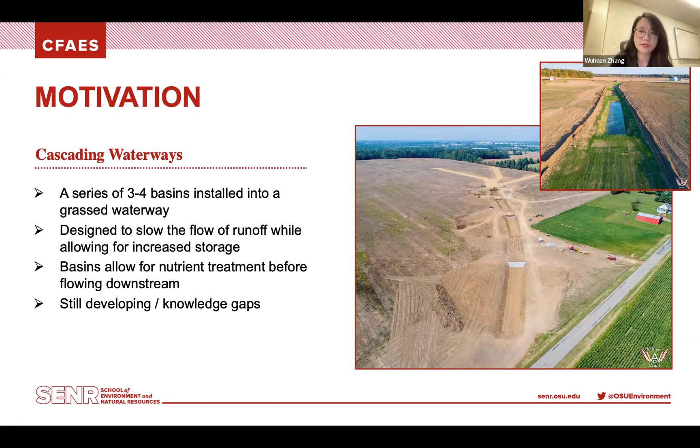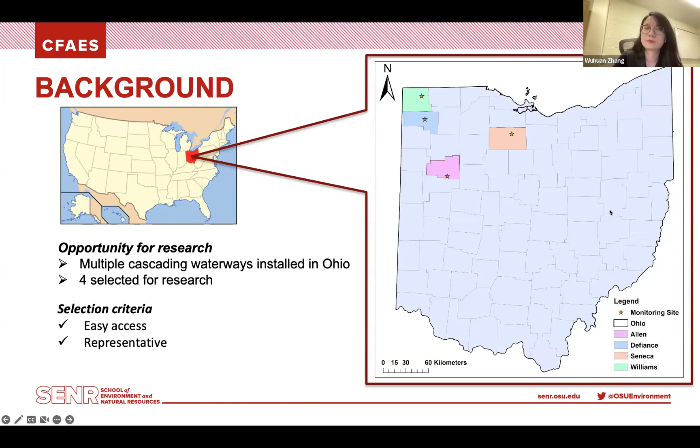We are interested in both the water quantity and the water quality performance of these selected cascading waterways. The water quantity parameters of our research include the water levels, flow rates, and the flow volumes, to learn more about the volume reduction after the treatment through the cascading waterways for all the monitored storm events, with the infiltration and evaporation considered.

And the water quality parameters we care about include the nutrients, total suspended solids, and isotopes. The stormwater samples collected from our field through the H-flume paired with an ISCO autosampler will be carried back to the OSU water quality lab from our fields for chemical analysis.

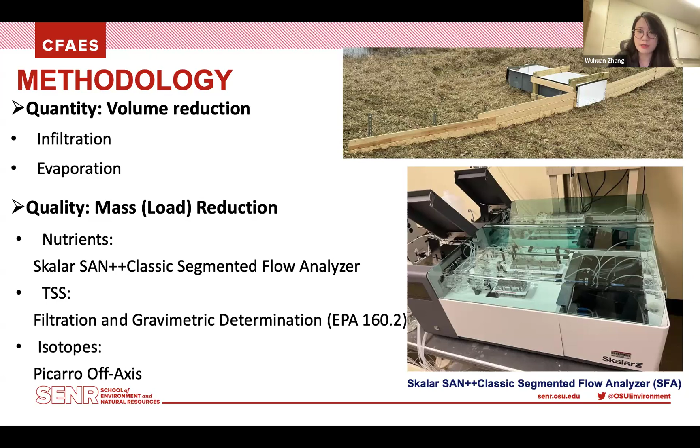The figures in this slide show the types of equipment which are employed in our field and in our lab. The top one is an H-flume installed in the field to collect the inflow. And the picture at the bottom is the SFA equipment to be used to analyze the nutrients in our lab.

The nutrients in the water samples we are interested in include the total phosphorus, total nitrogen, dissolved phosphorus, and dissolved nitrogen. They are tested by the SFA in the Ohio State University Service Testing and Research Lab in Wooster. And the total suspended solids are analyzed through the EPA methods in our lab. And for the isotopes, the samples will also be carried to the Columbus main campus to test the isotopes in the water samples for analysis.

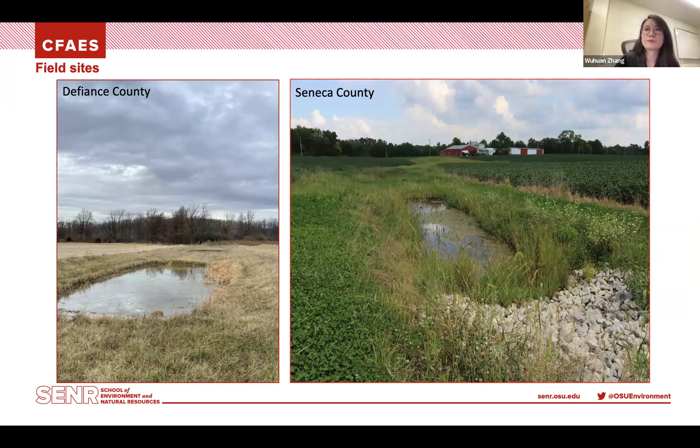Until now, multiple pieces of equipment have been installed in our field by our team to start the initial monitoring work, including the weather station, HOBO piezometer, and the field cameras. The METER weather station can measure and record the weather information, such as rainfall data, relative humidity, and air temperature. It's also able to upload the data into our cloud through the data logger paired with it, so that we can get the data and information remotely.

And the HOBO gives us data on water temperature and water pressure in the basins, which we can use and convert into the water volume of each basin to see how it changes over time with the rain events, and then consider the evaporation or infiltration. The field cameras could help catch any potential motions and movements in the field. They are installed in the hope of taking some photos of the storm runoff during our monitored rain events.

We also grab samples from all of our sites at least once a month to test them for nutrients and isotopes to further determine the evaporation and the nutrient load that is happening in these basins.

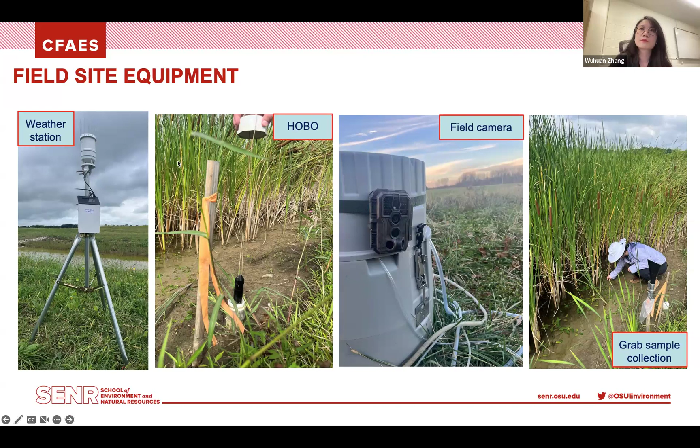And these wood boards, as you can see here, will work as the wing walls to make sure as much runoff as possible will travel through our flume for our flow volume recording and calculation.

This slide shows the field equipment which is used to collect the stormwater samples in more detail. The ISCO automated stormwater monitoring samplers are installed at each of the inlets and outlets of all of our 4 sites to determine the improvements of the stormwater flow and the water quality. And it will work with the H-flume together. And there is also a 730 bubbler paired with the ISCO autosampler.

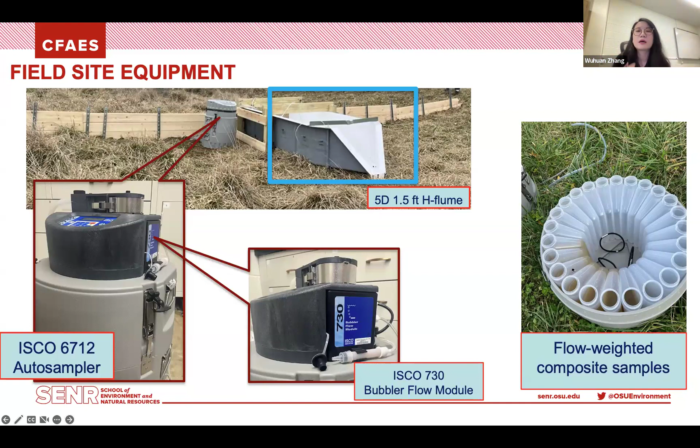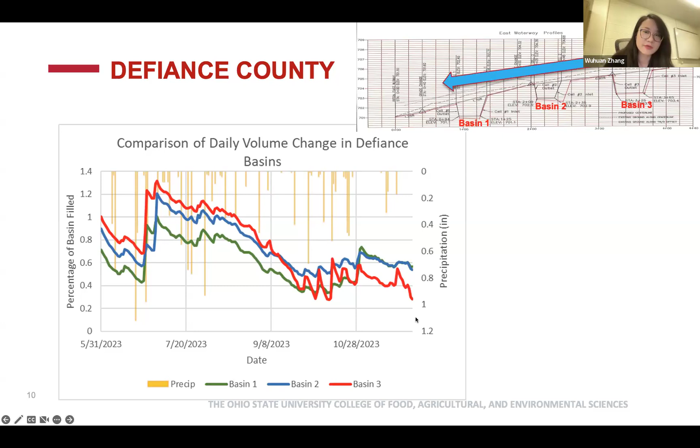The yellow bars in the figure indicate the rainfall depth records from May to December of 2023. The left y-axis indicates the percentage of the basin's filled. Any line above the number 1 here indicates that basin is overflowed at that time. And this figure shows basin 3 tends to be more filled than basin 1, while basin 1 only barely overflows once during the monitoring period of 2023. These results indicate that this cascading waterway system is working as intended to store and reduce water. And the overall runoff leaving the system is significantly decreased after the storm events.

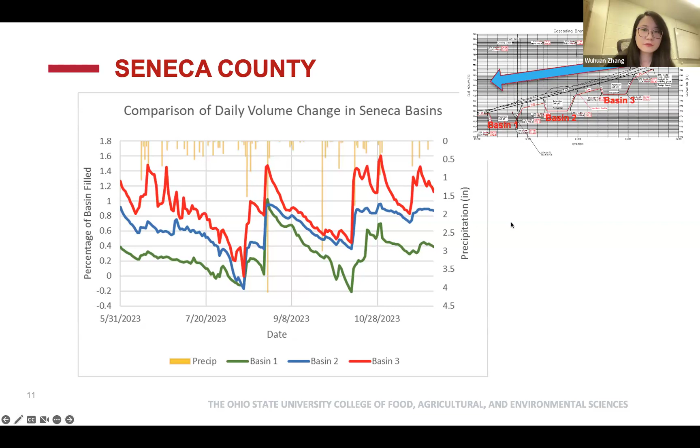However, as we get more flow data for the next step, we will know more about the basins, the nutrient loads coming in, and their functions in treating the chemicals. Also, as we move forward in this coming season, we will get more event-based samples, which will tell us more about this story.

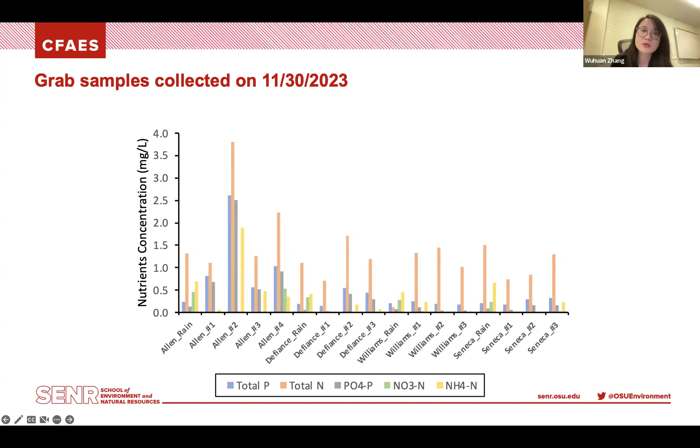For the next step, we will work through the performance data comparing the evaporation to infiltration rates. Until now, we have done the flume installations for the Defiance and Seneca County sites. The flumes for Allen County and Williams County are designed and will be ready to go out next month. We will also continue monitoring the performance of all 4 of our selected cascading waterway systems during storm events. Also, we will have our 5th site at Fayette County built soon. Once it's done, we will start some initial monitoring for it.

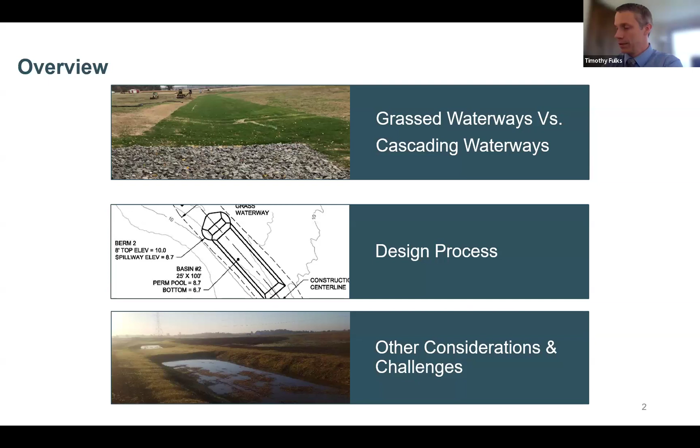Then we'll wrap up by looking at some of the other considerations and challenges we have with these projects. And if we have a little bit of time, I'll probably run through a few slides that highlight some of the projects we have installed so far. So with that, we'll move into the overview here.

So I thought it'd be good to start out talking a little bit about what's a typical grass waterway, why do we do a grass waterway, where do we put them? And the purpose of a grass waterway in a traditional sense is primarily to correct gully erosion or prevent gully erosion within a farm field. Places where we have concentrated flow paths going through the field that are eroding the soil away, creating soil loss, gullies that can be issues with farming.

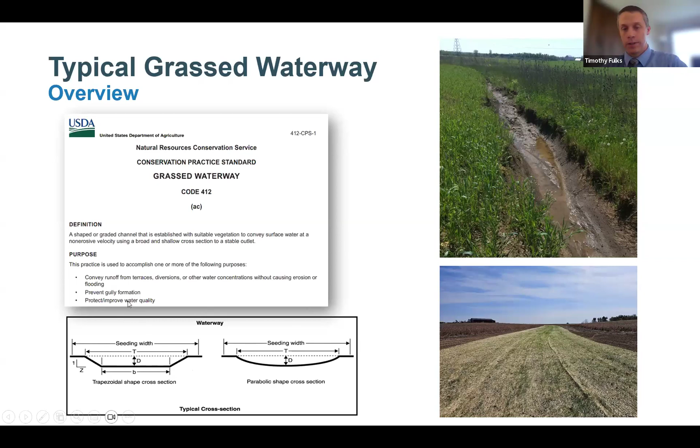So when we design a typical grass waterway, what we're trying to do is create a means to convey a given storm event. So usually we're designing for a 10-year, 24-hour storm event. We'll figure up how big is the watershed, how much flow can we expect based on the characteristics of that watershed. So that includes soil types, cover types within the watershed, drainage, subsurface drainage. We'll look at all those things to try and figure out what's the expected runoff and peak flows from that watershed.

And then from there, we'll start looking at what's the proper width, depth, shape, slope of that grass waterway so that we can convey that water without causing additional erosion and also keeping it moving so that we're not getting sedimentation of the sediments coming into that waterway. And that's an important design aspect of a grass waterway. We want to correct the gully erosion that's occurring in the field and prevent additional gully erosion.

But whatever flows into that waterway from upstream in the watershed, we want to keep that moving through the waterway. So solids, sediment, silt that are coming into a waterway, ideally, those keep moving through the waterway and exit at the downstream end. Otherwise, we start getting that sediment building up within the waterway, and we'll lose capacity in that waterway. It won't be able to convey the flow it's supposed to. Water can start pushing outside of the waterway, and we can create erosion again on the outside. So with a waterway, ideally, sediments, nutrients that flow in are also flowing out on the downstream side.

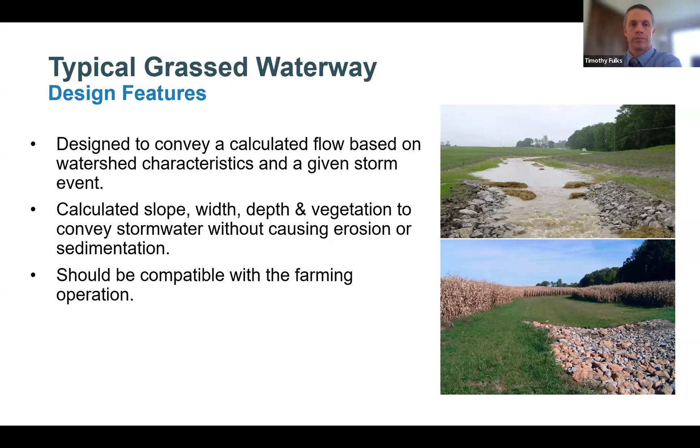So what are the water quality benefits of a typical grass waterway? Well, to start with, it addresses that sediment loss that we're losing from the gully erosion and preventing future sediment loss from the gully erosion. And on top of that, that's pretty much it. That's what we're striving to do, address that soil loss from the gully erosion, and that's it.

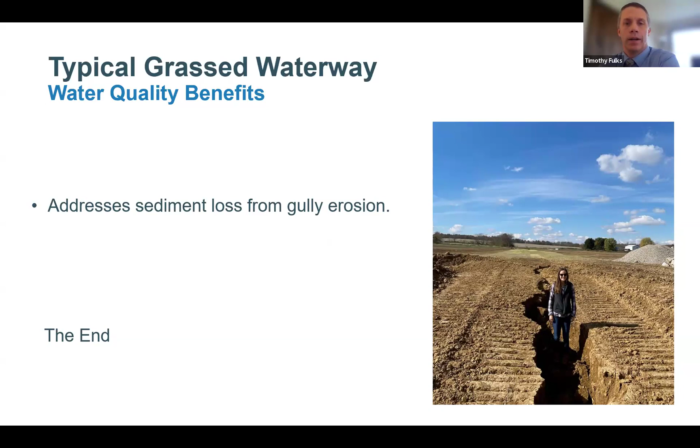You may see a little bit of sediment reduction. Again, that sediment that gets trapped in the waterway, but that's not what we're designing for. We're trying to keep that sediment moving through the waterway so that the waterway doesn't begin to fill in with sediment and create an issue with conveying that flow. You may get a minimal amount of nutrient cycling with the vegetation, but minimal at best. All right, so enter the actual cascading grass waterway.

So these, we designed them to convey that flow again, same way we would with a typical grass waterway. We'll design a traditional grass waterway shape that'll convey the predicted runoff and peak flows from the waterway. But then we're going to start adding in pools within the flow path of that waterway to create some additional retention and water quality benefits within that watershed.

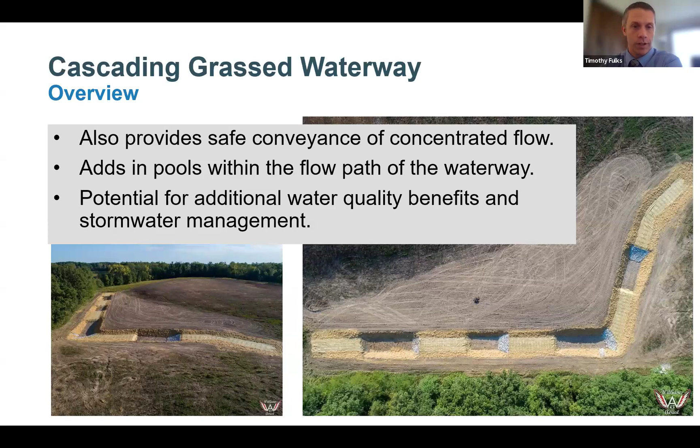And along with that, they did complete a 2-year study looking at reductions in runoff volumes, suspended solids, nitrogen and phosphorus. And they did note pretty decent reductions within runoff, the suspended solids, the nutrients. But the takeaway from that was that those reductions were all mass-based, primarily from the reduction in runoff. So they didn't see big changes in the concentration of your nutrients and your suspended solids. But since they had these pools installed, they reduced the total runoff leaving the landscape, thus resulting in a reduction in the total mass load leaving the system.

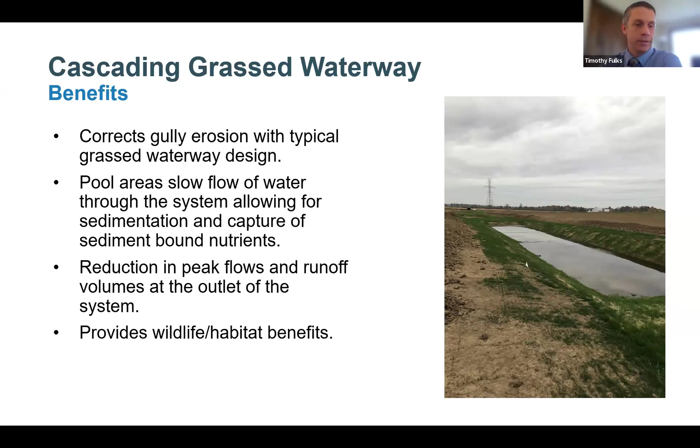All right, we'll talk a little bit about the design process and what we look at when we're designing one of these systems. So to start with, we'll typically just design a normal grass waterway. We'll figure out that watershed size and what the expected runoff volumes and peak flows are going to be, and we'll size that with our normal process.

We'll think about whether we want to do a parabolic versus a trapezoidal shape. A trapezoidal shape tends to lend itself a little better towards the cascading waterway system because we have this flat bottom within the cross section of the waterway. That works well with then transitioning into the excavated pool below that.

We can make parabolic cross section shapes work as well. The contractors just have to do a little bit more work to blend that outlet of the pool back into that parabolic shape downstream of the pools. But we can make either work, and we've done both within Ohio here.

After we decide on waterway shape, size, and flows, then we're going to start looking at what are our storage goals as far as the volume of water from the watershed. The design manual I mentioned earlier suggests shooting for 0.2 of an inch watershed acre inch of storage. So in practical terms, what that means is that, say you've got a 10-acre watershed draining to your system, you're trying to create storage equal to a depth of 0.2 of an inch over that entire watershed.

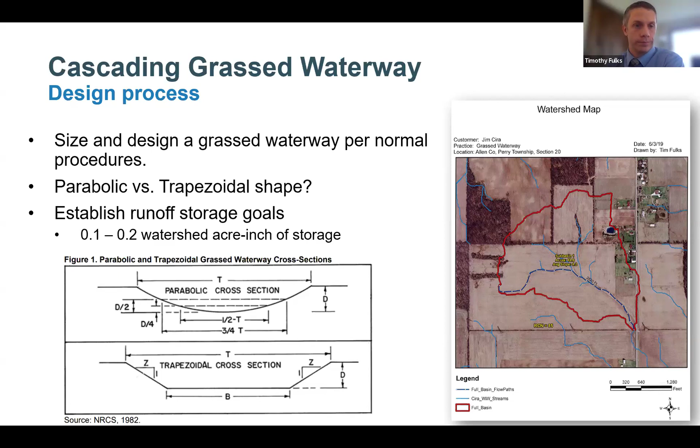Okay, so once we've decided on storage volumes for our pools, then we can start looking at how we're going to fit those pools within the waterway system. We could do excavated versus berm pools, or a combination of both. If you see this graphic here in the bottom left, this is a profile view of the water going through a system, starting here in the top left and flowing to the right. So in this case, this is an excavated pool within the waterway, and we've created all that storage volume simply by excavating this pool area out within the bottom of the waterway.

Compare that to the image here on the top right, where we're also excavating, but then we're using some of that dirt to also create a berm and hold back additional water. Here in Ohio, we've worked primarily with excavated pools and kind of shied away from doing bermed pools. We're not too crazy about building berms up within a waterway system that's supposed to convey that water downstream when we get a storm event.

This graphic in the bottom right here is a plan view look at a bermed pool system. So you can see we've got the berm here in the middle, but to be able to convey that storm flow around that, we have to build in spillways. So we end up with a wider waterway system. So for everything we've done in Ohio here, we've done just excavated pools, which creates more earthwork to deal with. We'll talk about that a little bit more here as well.

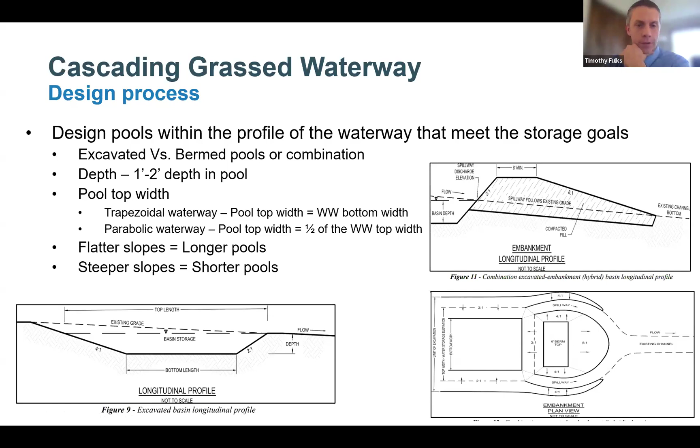So if you're looking at this profile view of a waterway system, this solid pink line here would be the design profile of our waterway. So this would be the center bottom of a waterway.

This lower section is a relatively flat grade at 0.2%. And then here in the upper section, we've got a steeper slope at 1%. When we do an excavated pool, the controlling elevation is that downstream edge of the pool. So that's as deep as we can build water up within that pool.

And as we go upstream, you can see we have all this extra earthwork above the shaded blue area that we have to dig out, create extra dirt and earthwork just to get down to this depth where we can actually store water. And on this flatter slope, I can go from station 100 all the way up to almost station 600 before I've created 1 foot of extra depth of spoil that has to be dug out of there.

Now, if you compare that to this slope here where we've got a steeper slope at just 1%, I can only run about 100 foot before I've got the same depth of soil over top of that we have to dig out. So if I were to extend this pool here another 200 or 300 feet, we're going to have a lot of earthwork that we have to dig out just to get down to that depth where we have actual storage capacity.

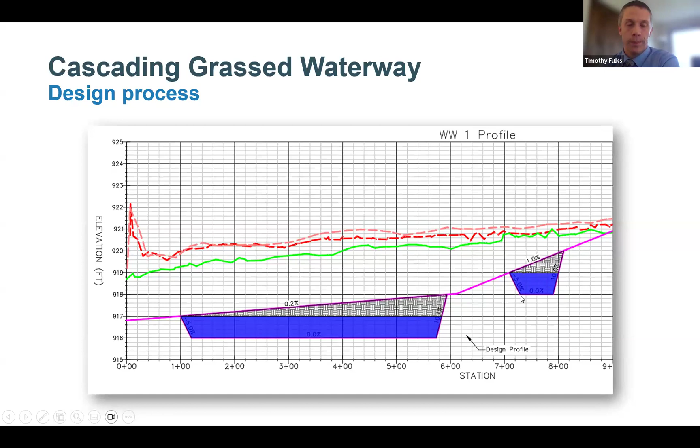So yeah, we like when we have flatter slopes, we can do longer pools, but when they get steeper, we ended up building in shorter pools to minimize that extra earthwork.

As we look at the inlet of the pool, where the water is going to flow into it, we'll design rock protection within there to help stabilize that soil and make sure we don't have erosion within there. Typically, we're going to do D or C size riprap, stuff that's 6 to 18 inches in diameter. So some bigger rock, stabilize that. We're going to try and keep that slope on the upstream side of the pool fairly flat to help minimize velocities coming in there and keep that bank stable.

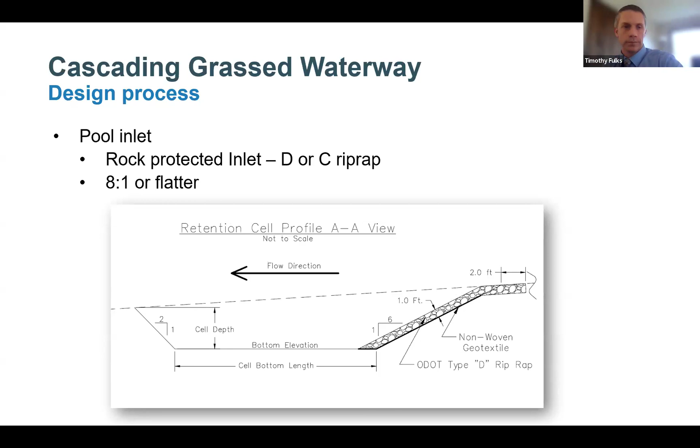On the other design parameters of our pool, on the outlet side, the downstream side of the pool, that slope can be a little bit steeper, 2 to 1. And then on the pool side slopes, we'll keep those 3 to 1 or flatter. One thing we have to look out for is, do we have concentrated flow paths trying to enter in the side of a pool area?

We've had a few of those where a smaller flow path flowing into the side of the pool has started to eat into the side a little bit. So we've got to keep an eye out for concentrated flows coming into the side there. May need to protect that or keep it a little bit flatter to keep those side banks stable as well. As far as spacing these pools out, we shoot for at least 50 feet in between those pools. Provide some space in between there, provide a place for farm equipment to pass in between the pools.

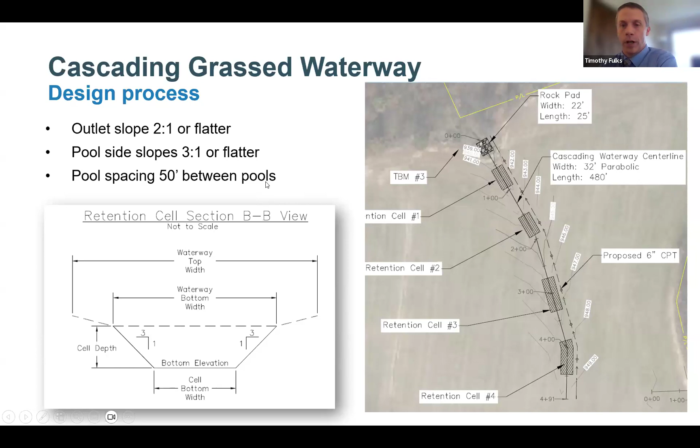All right, so those were the main design things we're going to be looking at when we're putting these on the landscape. I'll talk a few minutes about some of the challenges and issues we've run into with these. Obviously, the first one is if we're doing strictly excavated pools, we end up with a lot of excess soil to deal with. So to give you an example here, if we've got a 25-acre watershed and we're trying to store 0.2 of an acre inch within those pools,

every cubic foot of that storage has to translate into dirt that's excavated out of that waterway shape. So just to get that storage, we're going to be at 18,000 cubic feet or roughly 672 cubic yards. That's just to excavate the pools. It doesn't account for the overburden over top of those areas as well. So you'll have that extra soil as you excavate the soil over top of it, and then you're going to have your normal soil that you're excavating to shape the grassed waterway. So we end up with lots of dirt to find a home for.

If we've got some rolling topography within the landscape, usually it's not too much of a problem to get that blended in. In some cases, we've had other practices on site, wetlands or WASCOBs, where we needed that soil to create dikes or berms and were able to use some of it that way. But if you are interested in installing one of these within your farm field, start thinking about a place to put all this extra dirt.

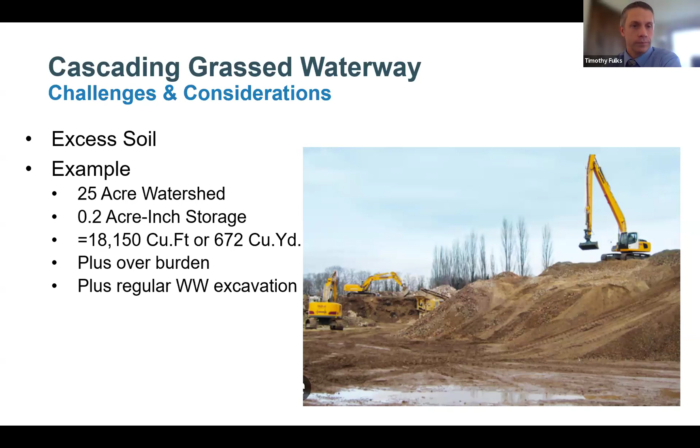The other thing we've run into, and I mentioned this earlier, is that here in Northwest Ohio, at least, we've got a lot of clay soil and they tend to hold water really well.

So what we end up with, these pools fill in with water and they stay full for extended periods of time. We end up with saturation on the downstream edge of the pools because those pools are staying full clear near to the top. So that water seeps through the soil, saturates the grass waterway just downstream of the pool, and it can be challenging to establish vegetation in those areas. Those areas stay soft and wetter longer, which can be a challenge for crossing equipment.

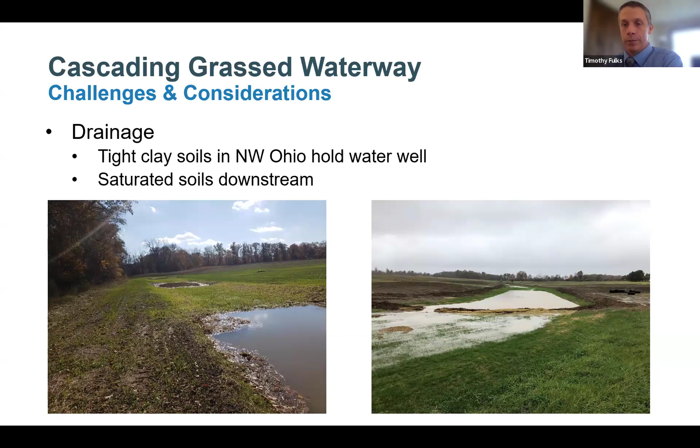So we'll look at that as we work with these in the future, look at ways to keep those pool elevations maybe drained down just a little bit so we don't get those saturated leading edges downstream of the pools. Actually, out in Maryland, where they installed the first system, one of their concerns was runoff storing in those pools and getting away into the groundwater too quickly. Obviously not a problem we have here in Ohio. We've got the problem of everything sits in the pools too long. And we lose a little bit of that storm reduction capacity if these pools aren't draining down very quickly. So we're losing that benefit if we're not getting that retention gain back within the pools.

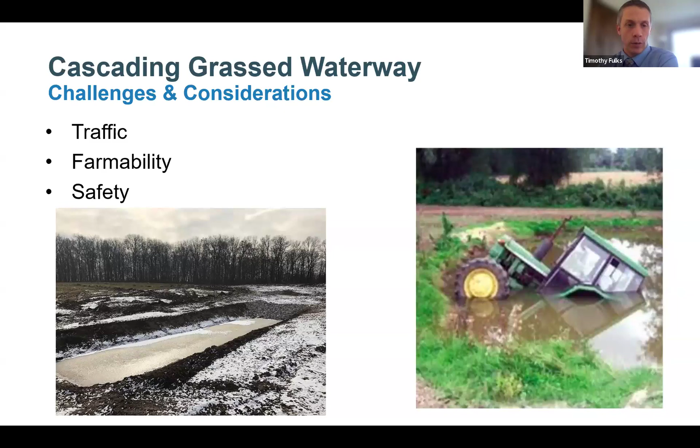Funding for these. So right now, this is not a practice funded by NRCS. So funding is not available through EQIP or CRP for these, as we don't have a conservation practice standard in place right now. The primary way we've been funding these so far is through Ohio EPA 319 grants, as well as assistance from the Great Lakes Restoration Initiative. To be able to get funding through a 319 grant, you also have to have a 9-element plan in place for the watershed. So that's one of the first steps to be able to secure that funding, is to have that 9-element plan developed, identify those needs within the watershed to have this kind of practice, and then that opens up funding opportunities through Ohio EPA.

As far as design and review and approval, since there is no current NRCS practice standard, this practice can't flow through NRCS engineering staff. So we're either working with private engineering staff or ODA's Division of Soil and Water staff can assist with engineering those, so long as we have district partners that are willing to help us with the groundwork, and we can help go through the design and review process and get these designed and put out there.

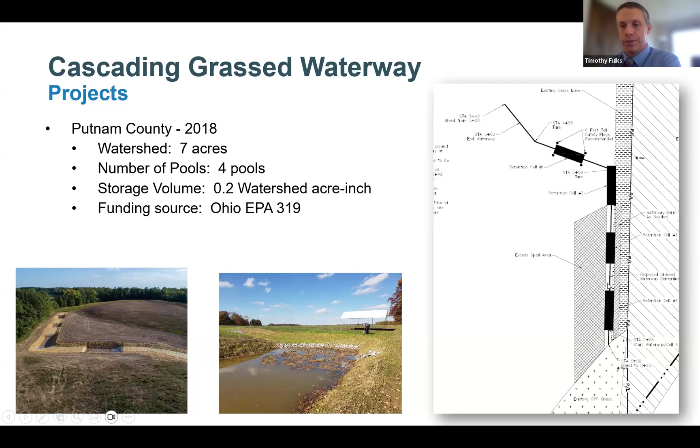Okay, so that's pretty much it as far as design considerations and some of the other challenges and things we've seen on these. I've got a few more slides here that highlight some of the projects we've done so far. These slides don't cover every single project we've done in Ohio, but we've got most of them here. So here's one we did in Putnam County back in 2018. Watershed was 7 acres, so relatively small watershed for the waterway. We installed 4 pools there, and we were able to hit that 0.2 of a watershed acre-inch on our storage goals there. In this particular one, we pushed the waterway up along the edge of the field here, along an access lane, and that helped get it out of the middle of the field, so it was less of an issue farming around it.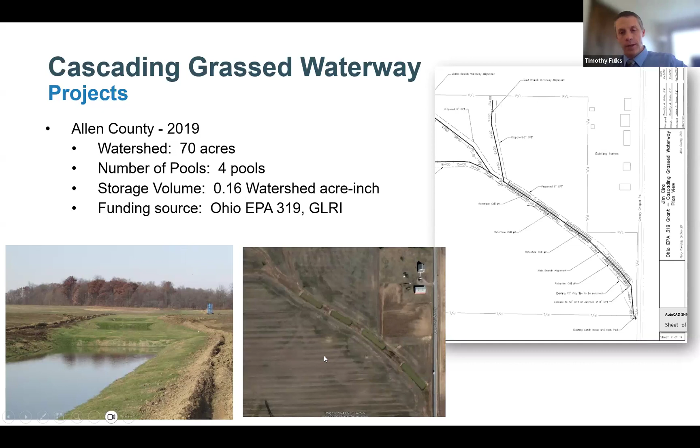Here's one we did in 2019 in Seneca County at the Soil and Water District owned farmland they have out there. This was an interesting one as we were able to install a number of different practices on site. So let's look at the picture on the right. We've got a water and sediment control basin here on the left side. We've got a branch of the waterway here that has our 3 cascading pools. We had a traditional grass waterway here on the right side. Then it all joined together downstream into a traditional waterway again.

Then it outletted into a diked wetland cell we created here down at the bottom end. So small little wetland cell. We created a dike here at this end to back that water up. And that dike here and the WASCOB over here gave us a place where we could use some of that excavated soil from the cascading pools and find a home for it and a use for it. Again, EPA 319 funding for that one, and we were able to get a decent amount of storage within those pools.

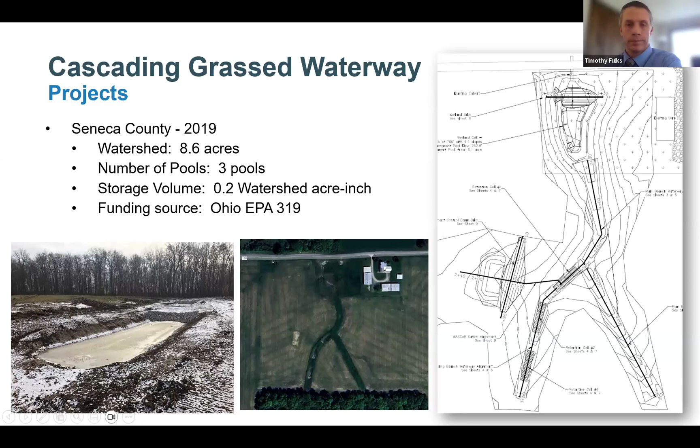Here's one of the 2 projects in Williams County that have been installed to date. This one's got 35 acres. I've got 4 pools listed here because that's what we designed for. I think in the end, they actually ended up with 3 pools and 2 of them got combined. The storage volume goal there was 0.16 watershed acre inch. And again, this was another one where we had a diked wetland on site that we were able to use some of that spoil for.

Another interesting thing we did with this project is this picture here in the bottom right is the outlet structure for our grass waterway into a ditch there along the turnpike. And we had some challenges with fiber optic on site, and we didn't want to excavate down too deep to use a normal rock chute, which would have 18 to 24 inch depth of stone that we'd have to excavate for. So we used what they call InstaTurf, which looks a lot like AstroTurf, but it's a manufactured product that you lay within that shape you excavate.

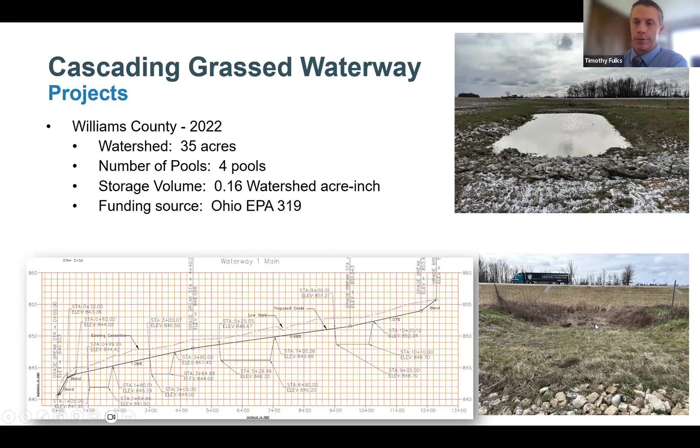You lay it in there, you stake it in place really well, and then you go ahead and seed it like you would a normal grass waterway, and you get a good stand of vegetation that grows right up through it that helps lock it all into place. And they're cost effective, and so far this one's held up pretty well, so we're going to keep those in mind as we look at alternatives to rock riprap chutes.

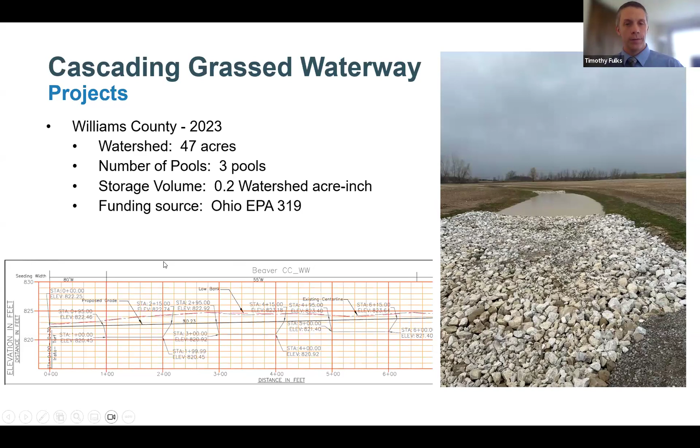Here's the other one in Williams County that's been installed. This is actually downstream of an existing wetland. So water flows through the wetland. After that, it enters this waterway system downstream, flows through 3 pools there, and fairly decent watershed on this one, 47 acres, but we're still able to come up with decent pools within here and get 0.2 of a watershed acre inch storage on that one.

And the last one I'll hit on here today is a project that we just got installed in Warren County. I think Tanner's on the phone from Warren County, and he helped with a lot of the design and getting this one installed. This site as well had a lot of different practices going on. We had a traditional waterway, we had a pipe drop structure, so some different things going on there. But for the actual cascading waterway, we had a smaller watershed at 9.6 acres. We dug in 4 pools on that one, and we're able to get some decent storage on this site as well.

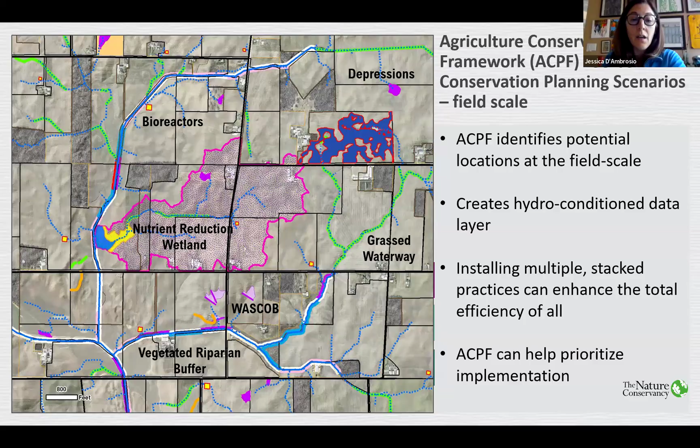So this is a relatively large site. It's about 3,100 linear feet. And luckily the landowners were willing to work together. That really helped a lot. And we were able to sit down and talk through what the resource concerns were. We had many meetings around the table and at the site to really talk about, okay, what can we do to help you address this resource concern?

And so the project that we're involved with Ohio State University is actually funded by Ohio Department of Higher Education. It's a Harmful Algal Bloom Research Initiative grant. And so that's the work that Wuhuan and Dr. Steve Lyon are doing to monitor these sites, to see if there's efficacy, to see how we can document the construction, the benefits, the site characteristics, the costs, and talk to people and see what is your experience in designing these, what is your experience in implementing them, and can this help meet some of our water quality and water quantity goals.